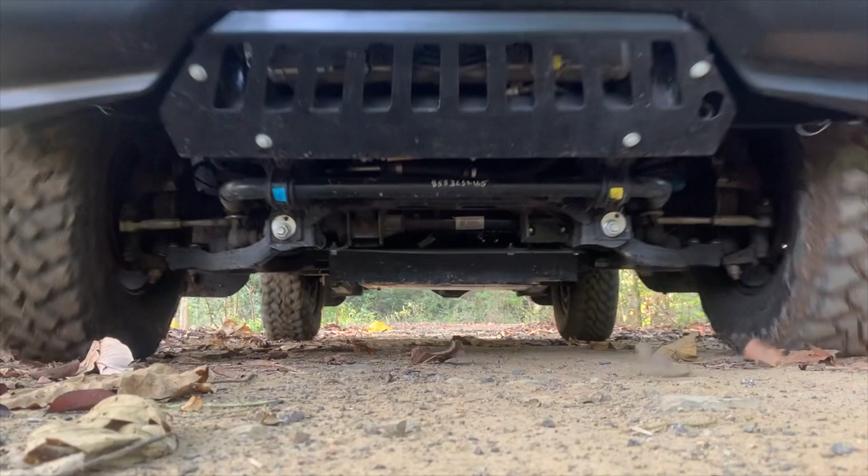On the other hand, a truck with simple mechanicals like the Gurkha requires more driver input, thereby also giving more precise control to the driver. Higher up the chain, in more expensive vehicles, complex electronics get involved and cut in automatically to aid the driver. As an extension of this logic, simpler the system, easier it is to understand and easier it is to repair. That's why we'll use the Gurkha to understand 4x4.

I intend to keep this video bare bones basic, so pardon me if it starts off way below your takeoff level. It's a basic off-roading 101 kind of instructional video.

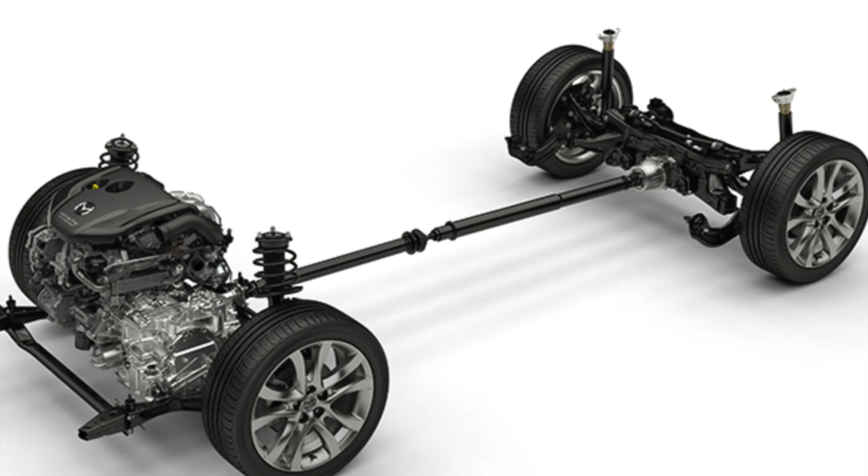The first question is, what is 4x2? Take any car you see on the road, it's got 4 wheels. Normally, the engine drives 2 of those wheels, in most cases the front wheels, in other cases the rear wheels. So out of 4 wheels, 2 wheels are being powered by the engine, so it's a 4x2. Depending on which set of wheels receive the engine power, it is called front wheel drive.

Example, the Mahindra XUV 500, or rear wheel drive. Example, the Mahindra Scorpio, where the engine drives the rear set of wheels and the front wheels are used only for steering. Then what is 4x4?

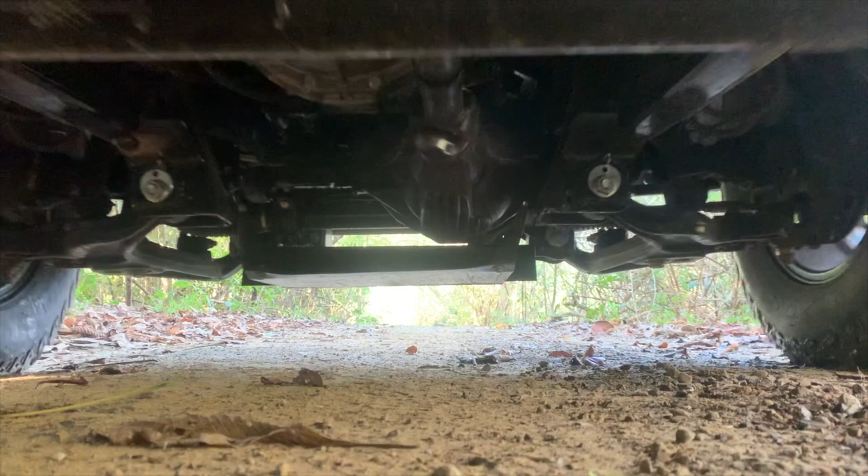Simply put, the car has 4 wheels and the engine power is sent to all 4 wheels. If this power is sent all the time, always on, then it's called a full-time 4-wheel drive. Example, Toyota Fortuner full-time 4-wheel drive. If the power is normally sent to only one set of wheels, say the rear wheels, and on demand from the driver it can be sent to the front wheels also, then it's called a part-time 4-wheel drive or an on-demand 4-wheel drive. Example, the Mahindra Thar or this Force Gurkha.

So what's the difference and how does it work? Before you start crushing terrain on your 4x4, it is very important to understand how the system works. Please watch this video fully, because I'm sure it will help you get better at off-roading, and it will also help you understand your car better.

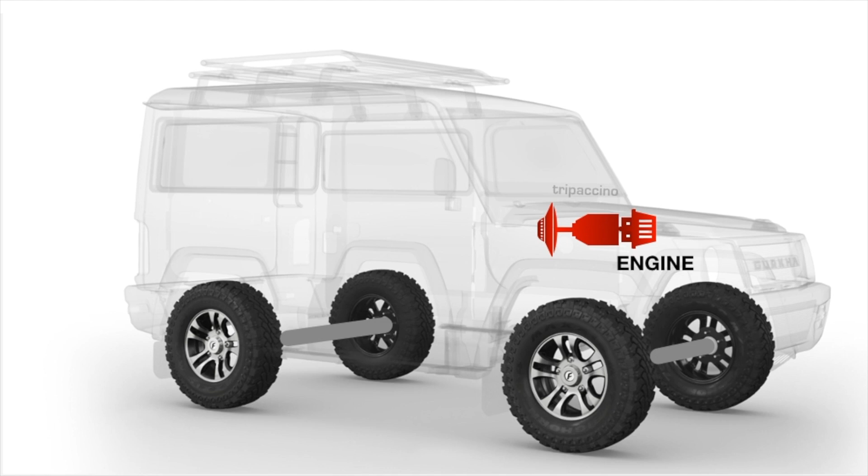Let's take my Gurkha. Let's go into X-ray mode to get a closer look at the mechanicals. We will look at the wheels and how power is delivered to them. The engine is the heart of the vehicle. The engine uses fuel, petrol or diesel, whatever you put into your tank, to make power. Well, strictly speaking, it makes torque.

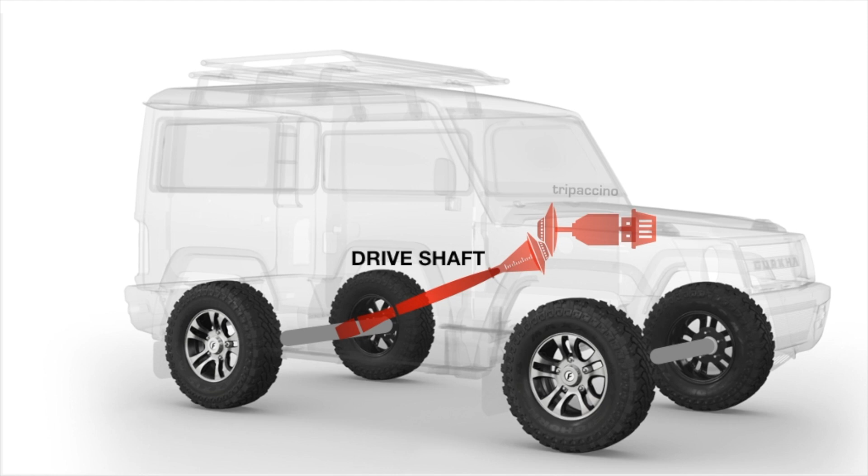That is, it makes rotation of a shaft happen, right? So this goes through the gearbox, which is the set of gears you control with your stick shift, and the transmission. The transmission then attaches to the driven wheel's axles through propeller shafts, or let's simply call them drive shafts. So from engine to gearbox, transmission, then to the axles through drive shafts.

In a 4x2, say rear wheel drive vehicle, the transmission only supplies torque to the rear wheels. However, it doesn't give it directly to each rear wheel. It instead gives it to something called a differential. What is this differential? It's a component that lets each wheel spin differentially, or simply lets each wheel spin at different speeds. Think of it as a box that takes torque from the drive shaft and distributes it differently to each wheel it is connected to.

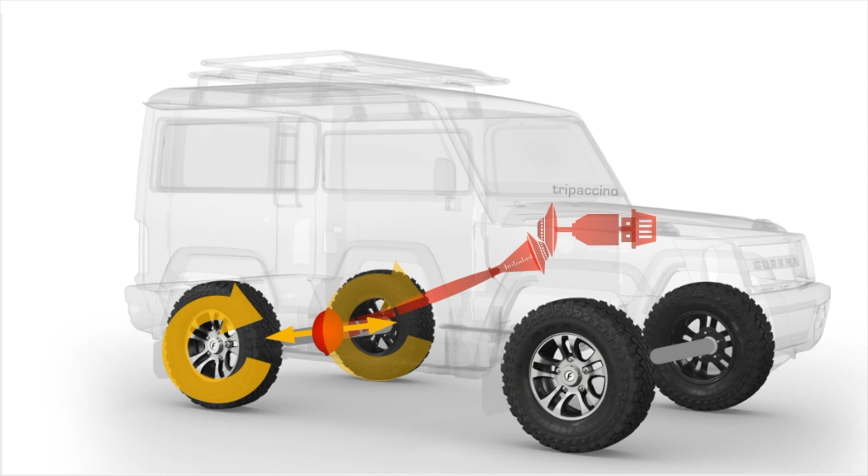For example, in the rear wheel drive car, the torque is supplied only to the rear differential, and then in turn the differential splits the torque equally to the left and right rear wheel. Well, at least in theory, it is supposed to split the torque 50-50. In case the car is taking a turn, the inner wheels would obviously spin slower than the outer wheels, because the outer wheels need to travel a longer arc and a longer distance to complete the turn.

So the differential is what lets this happen. If it didn't, it would be like a train wheel where both wheels spin at the same speed, because train wheels follow the straight fixed train track. So that is the job of the differential. The bottom line is that the differential, or diffs if you want to sound cool, splits the torque between the two wheels it is in charge of.

And now, why did I say in theory the split is equal? Because say 100 units of torque comes into the differential from the drive shaft, then the diff is supposed to give 50% to the left wheel and 50% to the right wheel. Well, it doesn't always do that.

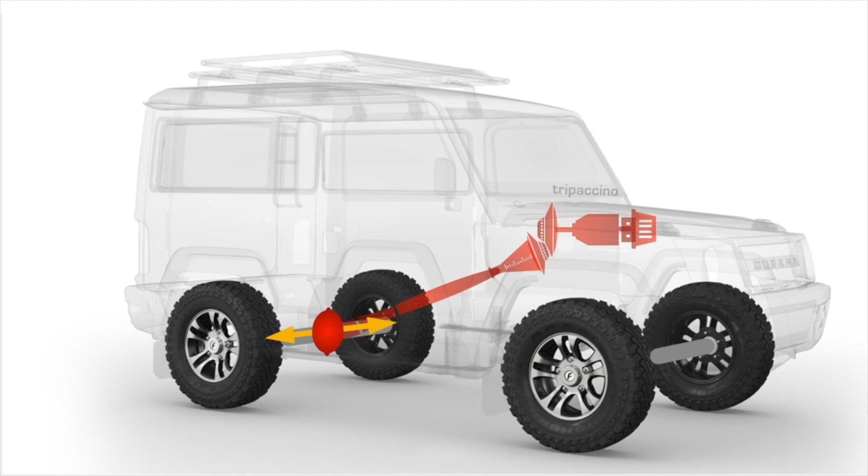Differentials are by default open, which means that they are open to transfer torque as convenient to the wheel which is offering least resistance, just like water or electricity. The torque will simply flow or take the path of least resistance.

Say your right wheel has been lifted off the ground, it's hanging in air and has no traction. The left wheel, however, is still on the ground and has got some traction. Because the diff is open, it will simply divert most of the torque received from the engine to this free spinning right wheel, because that's the path of least resistance.

But this is not what we want, because this will cause the wheel in the air to spin freely, while the left wheel, which actually can move us forward, cannot do much because it's not getting enough rotational torque from the open diff.

So, if in some way we could lock the open diff, then this differential action would be locked and the diff would not be able to do this partiality between the wheels, and then both wheels would be forced to spin at the same speed.

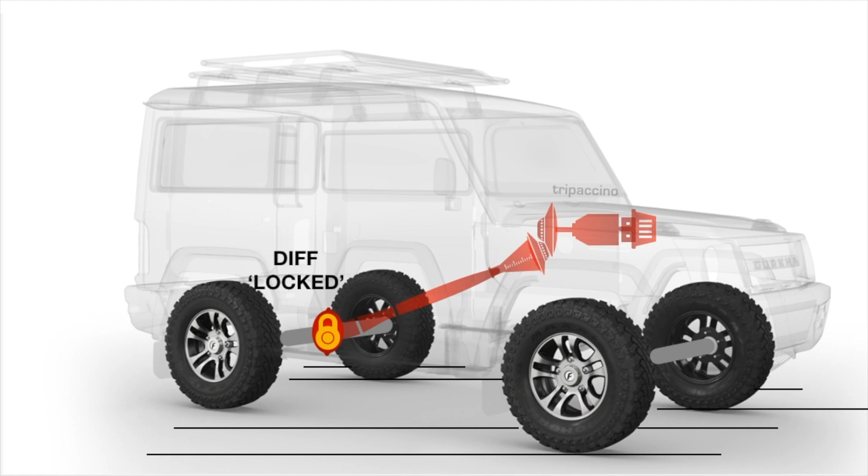Remember the train wheels example? Like that - if one wheel loses traction and the other wheel has some sort of grip, if by some way we could lock this diff - that can be done manually like in the Gurkha, or in some other cars it can be done electronically by a dial, or sometimes it's even done automatically if slip is detected.

However you achieve it, if the diff is locked, then this would force the wheel in air to not free spin, and the wheel on ground would grip and spin and move ahead, and we will be out of this situation easily.

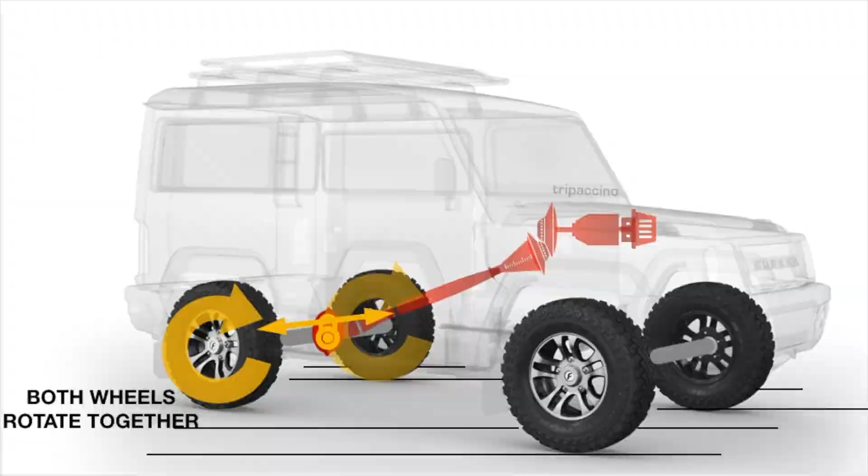Big warning: whenever you lock the diffs, remember that the wheels cannot move at different speeds. So your inner wheels and outer wheels, in case you have to execute a turn, will not be able to spin differently. So strictly no turning, no steering input when your diffs are locked.

Once you lock a diff, use it to drive out of this tricky situation straight ahead and quickly unlock the diff and open it again once you're out of it.

So all this was the 4x2 mechanism, when the rear wheels are the only ones being driven. What happens in a 4x4? Well, in the 4x4 there is a similar diff in the front also, called the front diff, which when supplied with torque does the same thing. When open, it splits the torque, and when locked, it does not allow slip between both wheels.

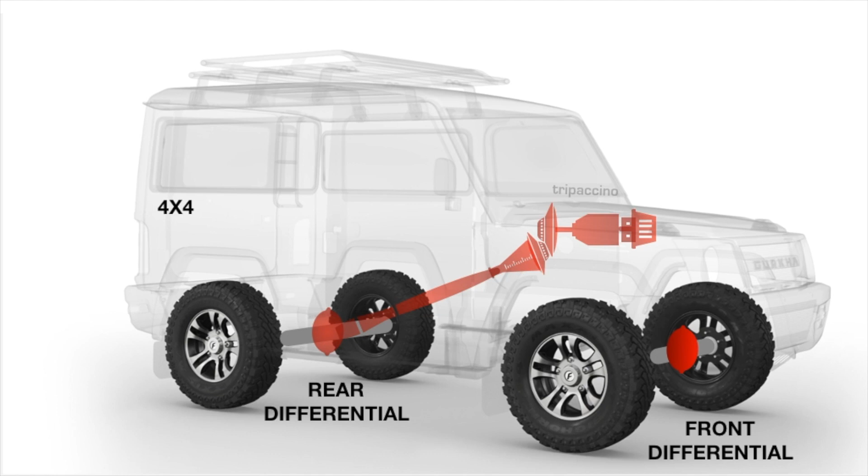The next obvious question is, how do we send torque to the front diff? Well, in 4x4 vehicles, both the front and rear drive shafts are connected by another box called the transfer case. The transfer case plays a double role.

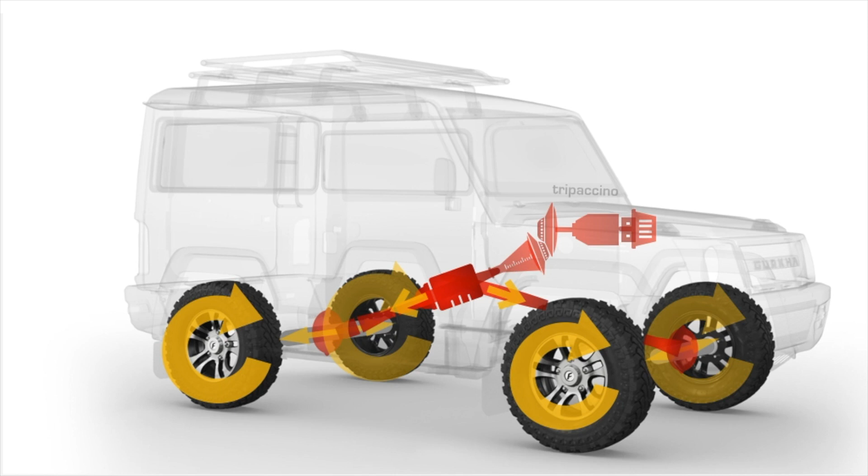The first role is to connect the front diff also to the powertrain by clutching in the front drive shaft in addition to the rear drive shaft, so that when you demand a 4x2 vehicle to go into four-wheel drive - that is, when you demand the engine torque to be sent to the front diff - the transfer case connects up the front drive shaft also.

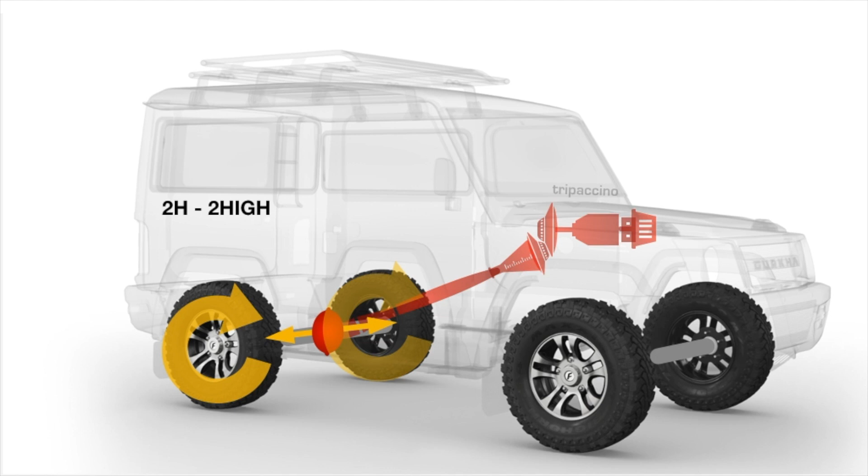Such a demand, where the transfer case transfers torque to the front drive shaft also, is called 4H gearing. Until this point, the car was being run in 2H gearing because only two wheels were being driven using the torque modulated through the gearbox. In 4H, however, the torque is driving all four wheels.

The word 'high' here indicates that we are using the existing set of gears in your gearbox, which are called high gears.

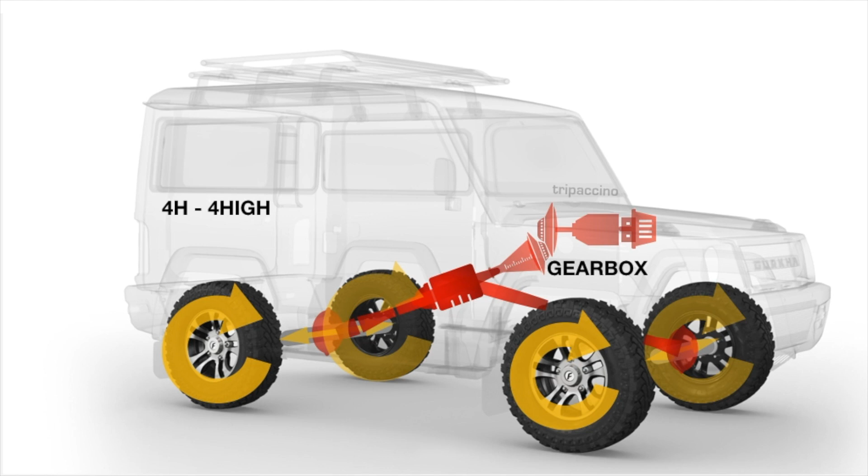When we slot the car into 4 low, then all of the 4 high events happen, but additionally the transfer case also does its second role - that is, it introduces another box with a lower set of gears to come into play.

Think of it as the transfer casing having another gearbox inside with a lower range of gears. What this is going to do is multiply the torque that goes through it, because of mechanical advantage. So you're going to get better pull from the wheels because of more torque being supplied to them, but the vehicle will obviously be slower.

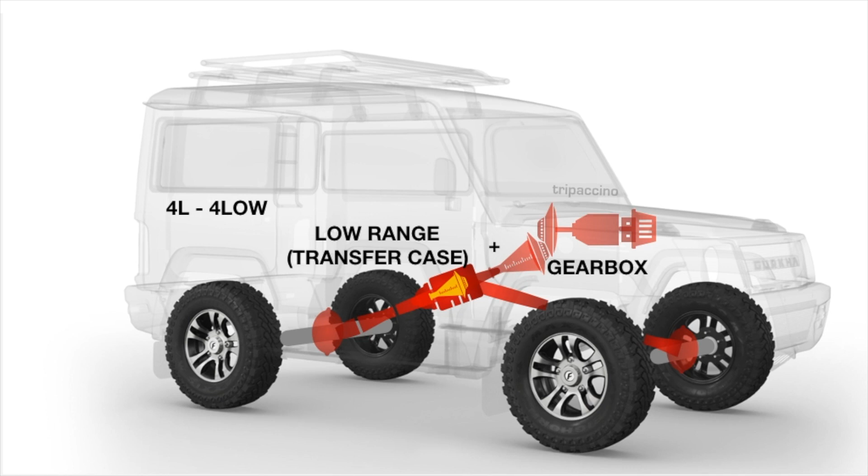This happens because the ratio of this torque multiplication, called the transfer ratio, makes the drive shafts rotate slower than the transmission. Typically something like 1:2.488 or even lower, depending on the vehicle and the transfer case in question.

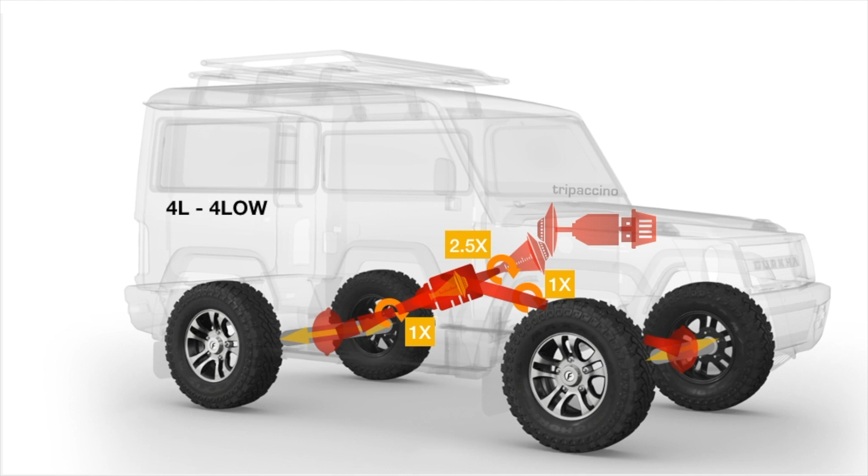So you can imagine the magic of this. The drive shaft will rotate one turn fully only after the transmission shaft has rotated about 2.5 times. So this is going to make the wheels move very slowly and grip the surface like a leech.

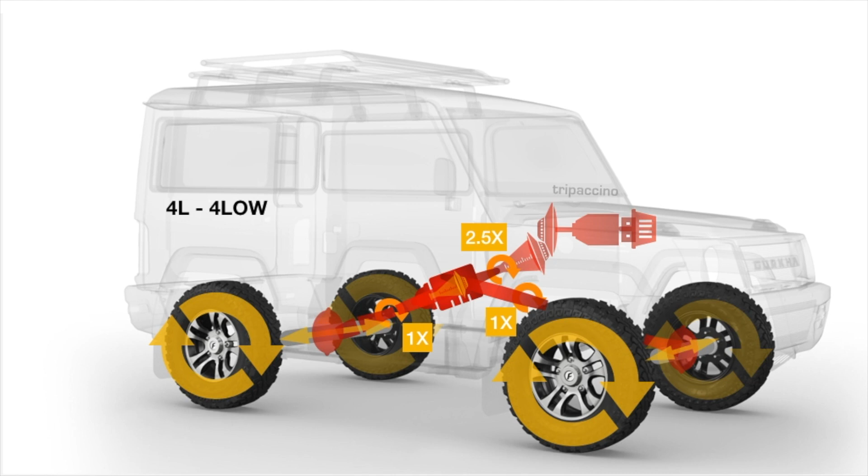This is like the beast mode of the truck and is to be used wisely and sparingly. Well, when to use this, I'll talk about it later in the next part of the video.

The last thing we will talk about is N, the neutral on the transfer case. This is not the neutral on your gearbox, but the neutral of the transfer case. This disengages and overrides all gears. It also overrides your transmission. So regardless of which gear you have slotted on your manual stick shift gearbox, 1, 2, 3, 4, 5 or even reverse, this transfer case neutral will disconnect and override everything.

So your vehicle can move front or back because all drive shafts are disengaged and all wheels are free. It is something like a toy car mode. You can just push the car front or back and all the wheels are free. It is meant, for example, if your car is being towed, then you want all the wheels to spin freely, then that's when you put it into neutral. Otherwise, when your transfer case is on neutral, you can keep revving the engine, but the car is not going anywhere.

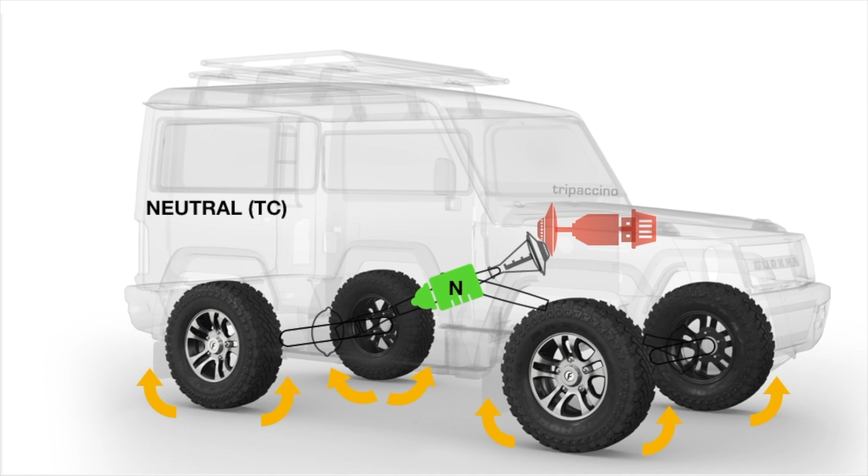Now that we know how it works, let's get into the truck and see the basics of driving a 4x4 and when to use which kind of gearing.

So in the Gurkha, everything is manual, so you have got independent levers for operating each function. This is the 4x4 lever which controls the transfer case. This is the manual gear lever which controls the gearbox transmission. And both the front and rear diffs which can be locked manually independently.

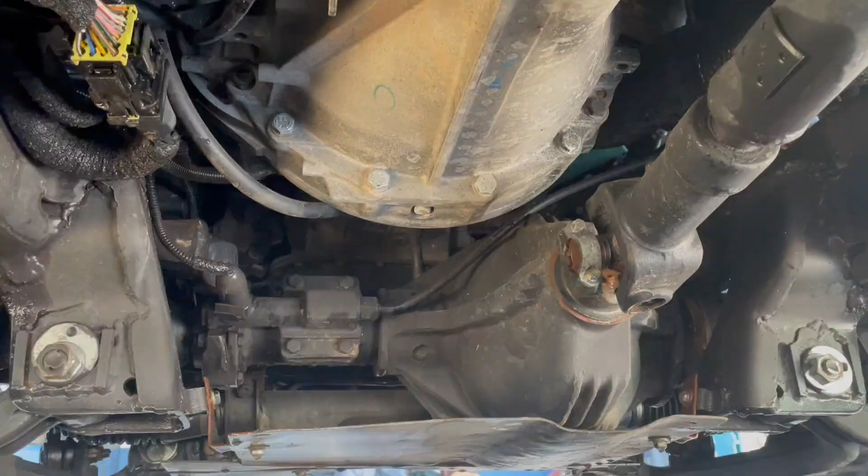Tip is to read your owner's manual. It has a wealth of information specific to your truck, and however little it may be, it's a gold mine. All vehicles are not built alike and only your owner's manual can tell you exactly how your vehicle works. Let's jump under the car and you can see the front diffs, the transfer case and the rear diffs.

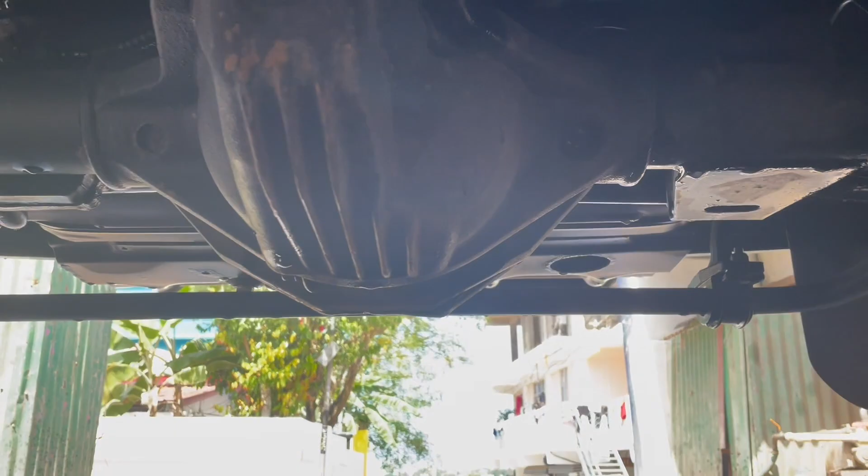First is the 4x2 high range or the normal range, that is the 2 high, 2H range. This is the default mode of the car. This is what your car is normally at, 2H. You do not need to touch the transfer case at all. Just leave it as it is.

It is meant for normal day-to-day driving on road, highways or even easy trails. Even slightly difficult trails can be easily handled in the 4x2 mode itself, that is in the 2 high mode itself, by vehicles like the Gurkha, as long as you have sufficient ground clearance and a good set of all-terrain or mud-terrain tires.

Now we will see when to lock the differentials. The same scenario explained previously: the left wheel has got some traction, but the right wheel is in air and it's spinning freely. So all the torque is being diverted to the right wheel in air, so we are not moving forward.

The Gurkha has both front and rear manual mechanically lockable diffs. So we just press the button, rotate the lever and pull it up to lock the diff for the particular pair of wheels. Once the diff is locked, both the wheels on the locked differential axle rotate together and you can easily wriggle out of the situation. Remember to drive straight, and once you're out of the mess, unlock the diffs and open them again as quickly as possible.